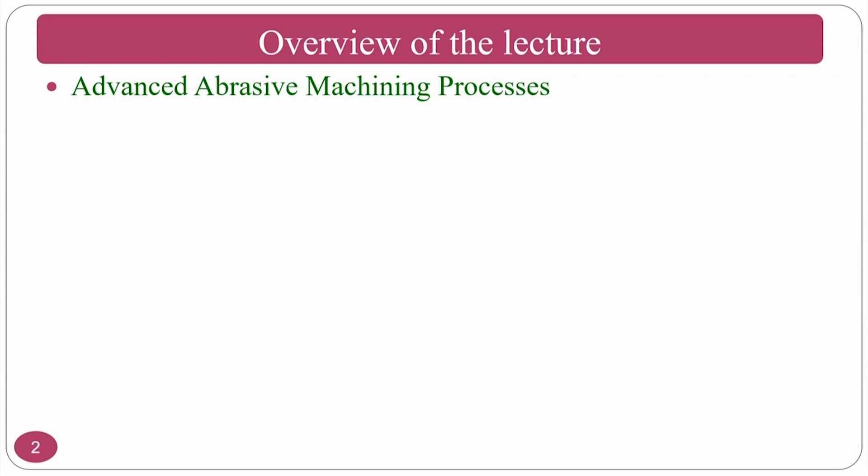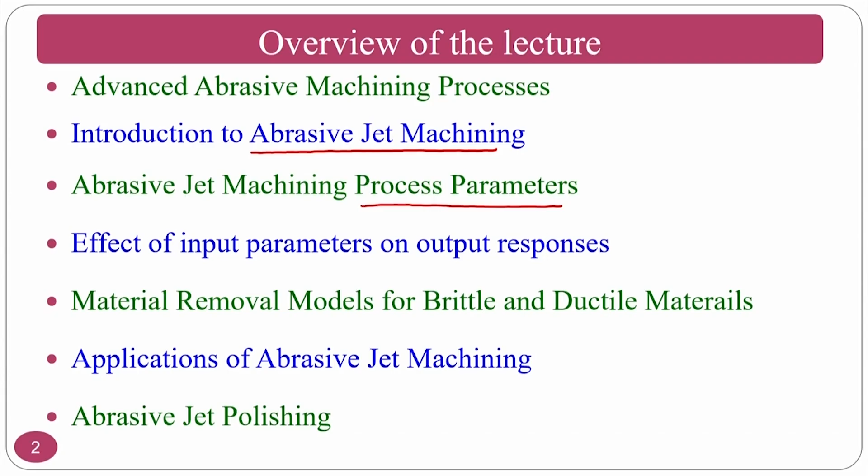Introduction to abrasive jet machining. We move on to abrasive jet machining, its process parameters, input parameters and output responses, and the effect of how each input parameter plays a vital role on the output responses, the material removal models for brittle and ductile materials, applications of abrasive jet machining, and at last a glimpse of abrasive jet polishing. This process can also be used for polishing applications, but the application wise for polishing is very less, so we just see a glimpse.

The advanced abrasive machining processes we are going to study in this section are abrasive jet machining, abrasive water jet machining, ultrasonic machining and elastic emission machining. These are mechanical processes where abrasives are used, and while there are a few other processes, these are the predominantly used abrasive processes in the spectrum of advanced machining processes.

We move on to abrasive jet machining. Most of the slides in this particular section are borrowed from Professor Vijay Kumar Jain, Professor Emeritus at IIT Kanpur. Some of the slides are courtesy to him, as he has shared them with me, and I am very thankful to Professor VK Jain for sharing his slides.

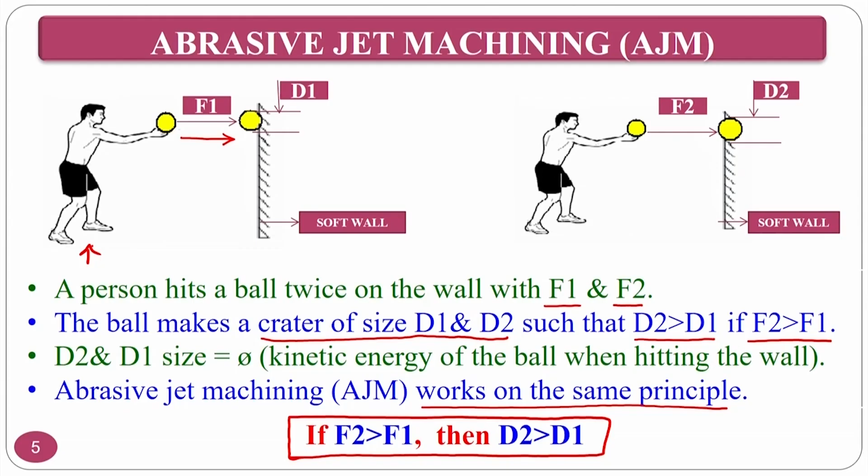And if you are going to hit this particular clay with force F1 and F2, what will happen? The crater size or cavity size formed on that solid clay will be more and more. If you are hitting with low force, small crater; if you are hitting with high force, crater will be very big. So, based on this principle, people came up with a technology called abrasive jet machining.

In this AJM, what you have to note is the carrier medium is air, or gas. You can use inert gases or other gases also to carry the abrasive particles along the direction of the velocity of the air.

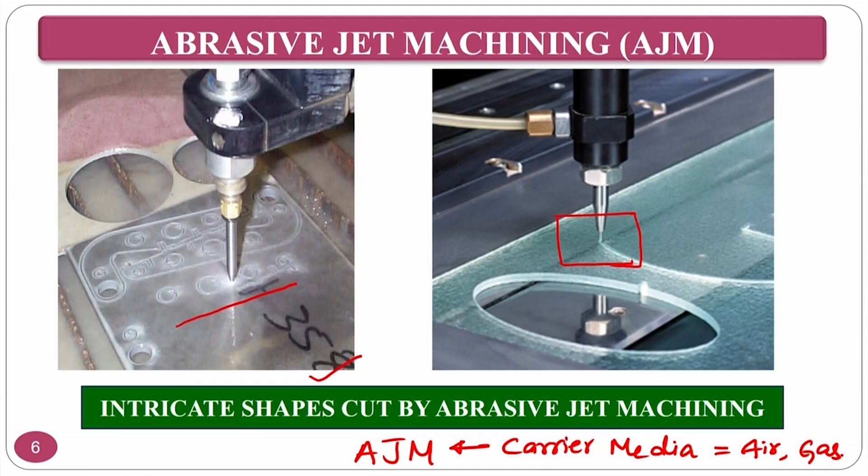The principle: fine particles, normally 0.025 mm, are accelerated in a gas stream, commonly air, at a few times atmospheric pressure. That means you can use 10 bar, 20 bar, 30 bar, 50 bar, like that. If you use terms in bar, people will understand that.

I am saying bar, but internationally, if somebody is watching, assume that if I use 10 bar, that means 1 megapascal. So you can use 1, 2, or 3 megapascal of air pressure, which is the carrier medium, and you mix the abrasive particles and inject them onto the surface to be impinged, so that you can cut intricate shapes or generate craters as per your requirement.

The particles are directed toward the focus of machining, less than 1 mm from the tip, which is normally called the nozzle tip distance. You will come across this term in the upcoming slides. You just focus on the workpiece so that you can cut it.

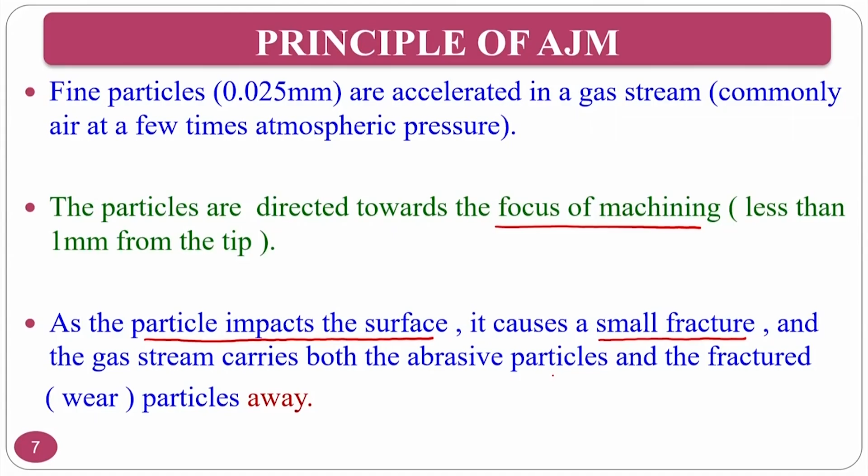As the particle impacts the surface with high velocity, this causes a small fracture, and the gas stream carries both the abrasive particle and the fractured particles away. So the gas stream, which is air, will carry both the abrasive particle and the fractured wear surface away. That means whenever you impinge, if it is a through cut, it will carry the debris as well as the abrasive particles.

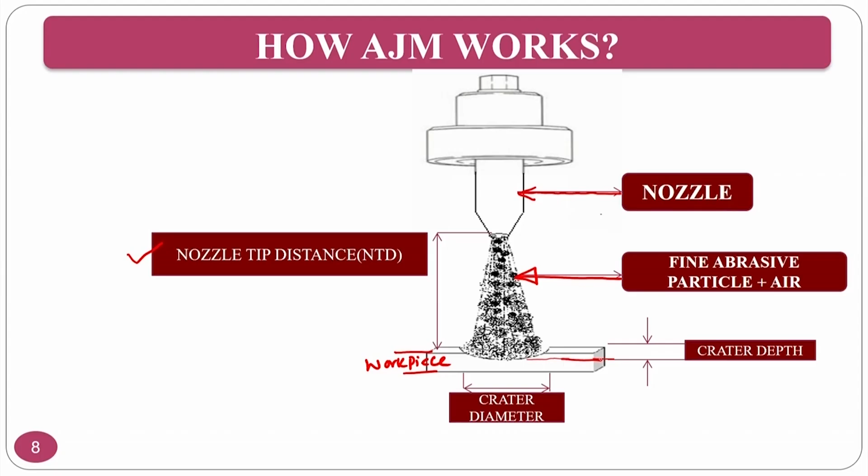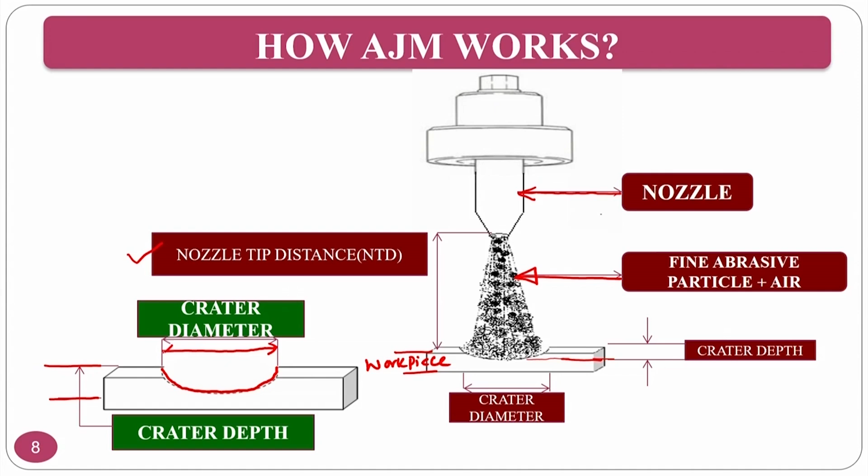So, how do you measure the crater diameter as well as the crater depth? If you see, this is my crater. The crater has its own crater depth, and at the same time you can measure the crater diameter. Depending on input parameters like air pressure, abrasive particle size, type of abrasive, and type of workpiece material, these will decide the crater depth as well as the crater diameter.

So compressor with a relief valve, air filter, dryer and other things. Dryer is required because you do not want any wet condition in the atmospheric pressure. So the compressed air will now be generated.

The opening valve will be there, a pressure regulator. This pressure regulator will tell what is the output pressure. Is the air that is passing here 1 megapascal, or 10 megapascal, or 20 megapascal, or something, whatever the pascal value that will show.

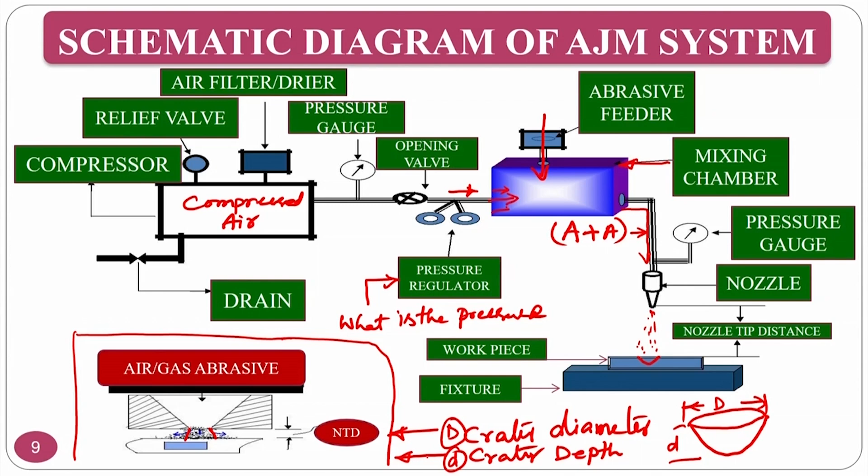The crater will be generated like this. Assume this is the diameter D and this is the depth small d. This will be the crater diameter and this will be the crater depth. So like that you can generate the cavity or crater on a particular material.

So the gas supply filters are required to filter out the moisture and other unwanted things, and the pressure regulator. You mix the powders here and you can even give vibrations to it so that you get more and more mixing at the same time.

Once done, then you just impinge. Now if you impinge, what will happen? The machining will take place properly and you can orient your nozzle as per your requirement.

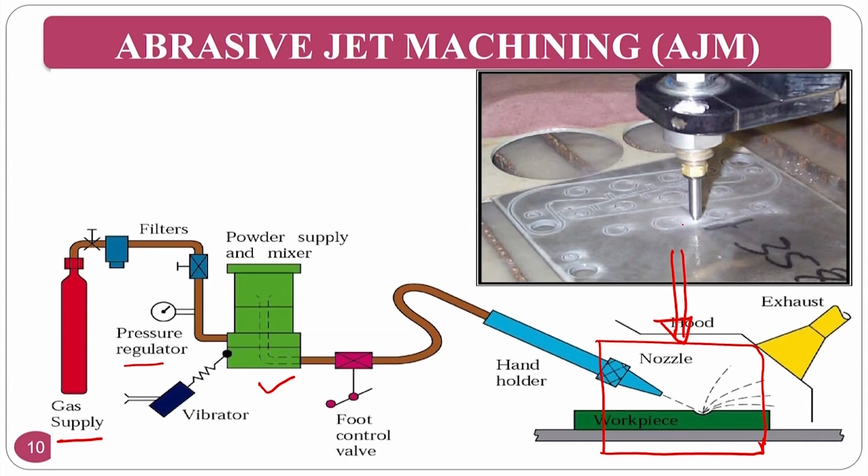Practically you can see how the cutting action is taking place by the abrasive jet machining. So the same thing you can see here, this is the nozzle and this is the machining. The box which is shown in a schematic is clearly shown in the experimental way.

So this is one of the experimental setups practically developed at IIT Kanpur. Again, I am very thankful to the professor who developed this at IIT Kanpur.

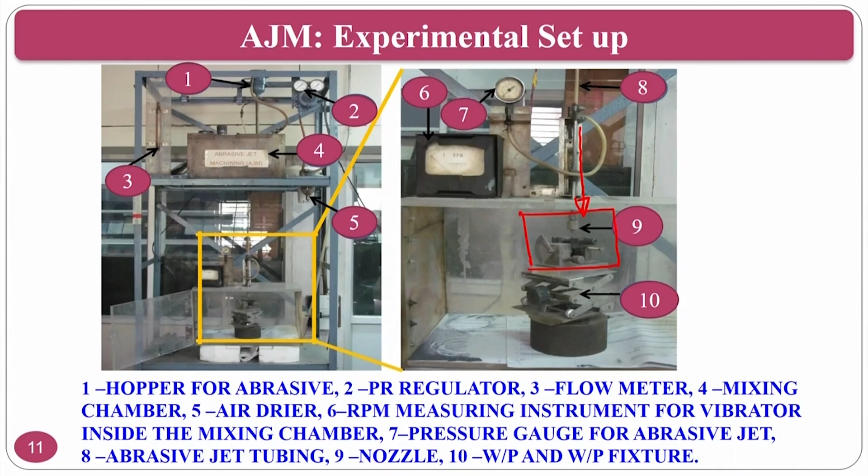Normally it shows a hopper for the abrasive, pressure regulator, flow meter, mixing and other things. This is the workpiece and abrasive jet machining region where the high pressure abrasive mixing is coming and impinging on your workpiece surface, so that machining takes place, the crater takes place and material removal takes place.

So what are the systems and components that play a major role in abrasive jet machining? One is the gas propulsion system, which is nothing but the supplying of clean and dry air which propels abrasive particles. Compressors are normally required.

Now if you want to compress the air to higher and higher pressure, you require a compressor. And the gases used should be non-toxic, cheaply available, and easily available. One of the best examples is air, which is considered the cheapest and most economic option, easily available in the atmosphere. Then there is the abrasive feeder, where normally the quantity is controlled by vibration.

You can control the vibration and control the amount of abrasive particles that are falling, controlling how much particles you require. You'll come across the term mixing ratio in the upcoming slides.

There you will see how much abrasive particles come with respect to the carrier medium, that is the air. The machining chamber should be well closed, abrasive particle content should be below harmful limits, and a vacuum dust collector should be attached. This should be carried out in a closed environment because if you are machining a ceramic or brittle material with brittle abrasive particles, there will be a brittle fracture and nanoparticle fragments with very high surface area that can cause problems to the operator. So it should be done in a closed environment.

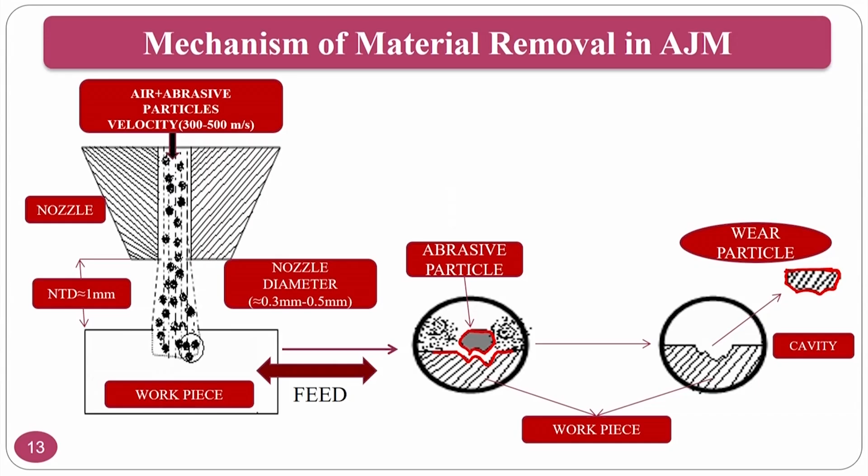In the mixing chamber, as the length of the chamber increases, mixing becomes better, but at the same time it may decrease the velocity. So bore diameter, type of chamber, and workpiece parameters like hardness and geometry details play a major role.

In the abrasives, flowability of abrasives, type of abrasives like SiC (silicon carbide), alumina, boron carbide, or cerium oxide, and the volume fraction you are going to mix, meaning whether you mix in ratio 1:1 or 1:10 or something.

At the same time, abrasive particle size, whether it is fine, coarse, or medium, plays a role. And the carrier medium also plays a major role. Which type of carrier medium, whether you are going to use air or argon or any other inert gas, and the pressure, how much pressure.

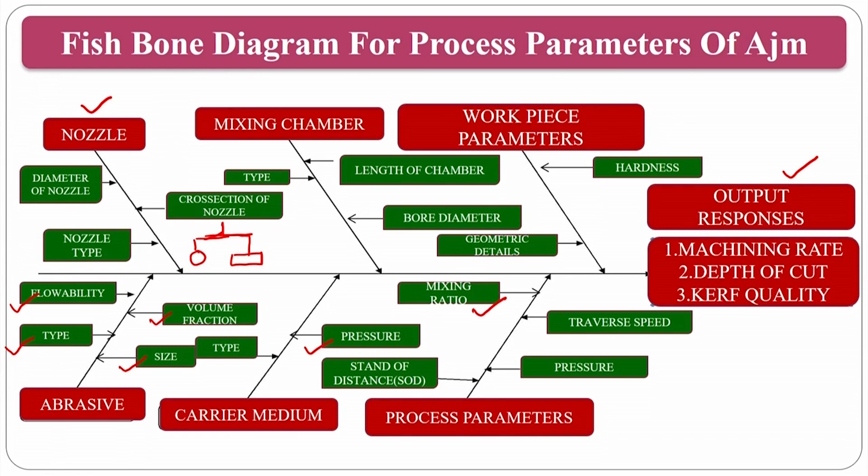So the abrasive jet machining process parameters, the main parameters among all the spectrum, we have 3 or a few more that some people follow.

The most important one is the abrasive particle, which is nothing but the composition, strength, size, and mass flow rate of abrasive particles.

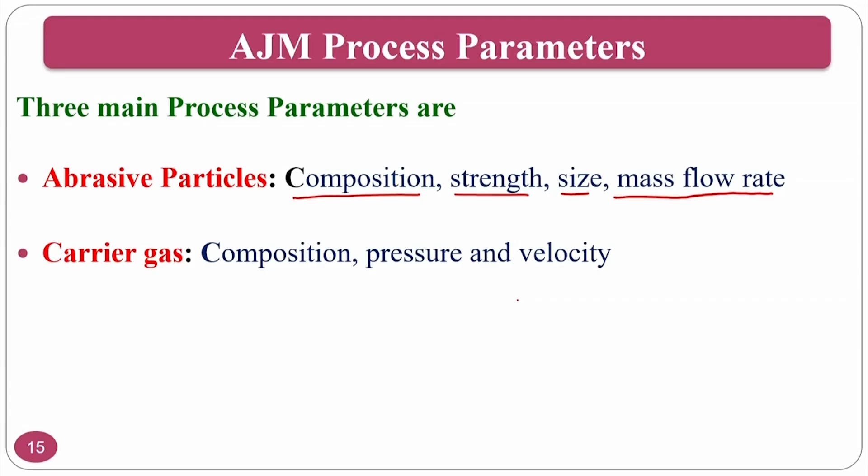At the same time, carrier gas composition, like air or argon or any other inert gas you are going to use, at what pressure and at what velocity it is helping the abrasive particles to hit the workpiece. And the nozzle geometry, nozzle material, because as we have seen in the previous slide, sapphire is one of the best materials.

The life will be approximately 300 hours for one nozzle. So if you are going to use very low quality materials for the nozzle, what will happen? Your nozzle goes off, your nozzle wears out, and you have to go for a new nozzle. So the non-productive time increases, so the product cost will go up, because your production time will increase for a particular component.

The standoff distance is one of the things, that is nothing but nozzle tip distance. Some books follow nozzle tip distance, some follow standoff distance. The standoff distance and nozzle tip distance are both the same, which is nothing but the distance from the starting of the nozzle to the surface of the workpiece. This is nothing but the standoff distance or nozzle tip distance.

And the feed rate, at the same time inclination to the work. So whether you want to go for a certain inclination to the workpiece, or whether you want to put it perpendicular, all these parameters play a major role among the fishbone diagram.

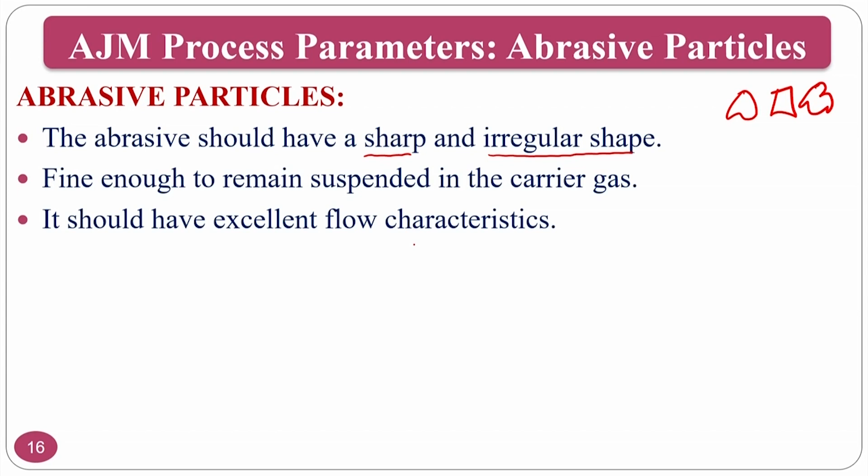It should have excellent flow characteristics, because it should follow the path of the carrier gas, so that it will do the required purpose.

Al2O3 is normally used for cleaning purposes, cutting purposes, and deburring purposes. Silicon carbide is normally used for applications similar to Al2O3.

But for harder materials, that means if you are going to use Al2O3 for softer materials, and if your customer comes with a slightly harder material, then you can go for silicon carbide. And for glass beads, you can go for a matte finish.

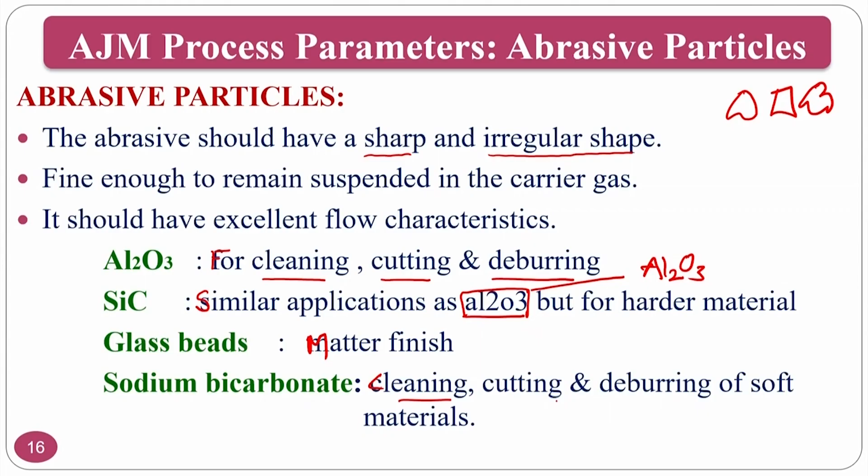Sodium bicarbonate can normally be used for cleaning applications, cutting, and deburring of soft materials, and other such purposes.

So, abrasive sizes and functions. If the size is small, large, or otherwise, normally the abrasive particle size of 10 to 15 microns is commonly used, because if you use very small particles, there will be a problem of agglomeration, meaning multiple particles will come together as an agglomerate. Normally in this gas assisted process you may not get this, but in water jet machining, or when some people use other liquids, agglomeration will be a problem. So you should go for specified particle sizes.

Normally small sizes are used for cleaning and polishing, and larger sizes are used for the cutting process. As I said, we will see abrasive jet polishing at the end of this class, where you use fine abrasive particles so that you can get the polishing operation.

Reuse is basically not recommended, because it will be contaminated with chips and may block the nozzle passage, lowering ability and lowering cost. That means, assume I have an abrasive particle with a very sharp edge. Whenever you use it the first time, the sharp edge may remove the material, but the second time, what happens? It becomes blunt and its efficiency goes down.

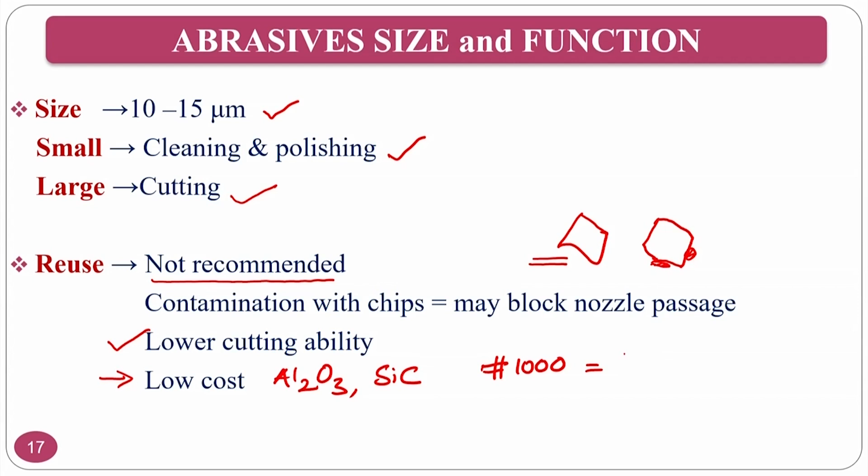At the same time, abrasive particles are not that costly, so it is economical to go for Al2O3 or SiC. These particles nowadays, compared to what we used in 2015 and 16, you can get in the Indian market at around 1000 mesh size for approximately below 500 rupees. So up to 1000 mesh size, you can get approximately 500 rupees per kg for Al2O3 or SiC, both approximately available within India.

Some companies placed in Agra provide this type of abrasive particles. If you go for better abrasives from abroad nations like Germany and other countries, import and export charges may come into picture and the cost of the abrasives may go up. For the applications of abrasive jet machining, I guess you can go ahead with this available abrasive particles in India.

The second thing to note down is that normally aluminum oxide (Al2O3), silicon carbide, sodium bicarbonate, dolomite, and glass bead are the commonly used abrasives. The different particle sizes are also mentioned, and aluminum oxide and silicon carbide are mostly used in abrasive jet machining for the cutting operation and grooving operation.

At the same time, for light finishing, I normally go for sodium bicarbonate, which can be used for finishing applications. At the same time, dolomite can be used for etching and polishing applications, and for light polishing and fine deburring, you can go for glass beads.

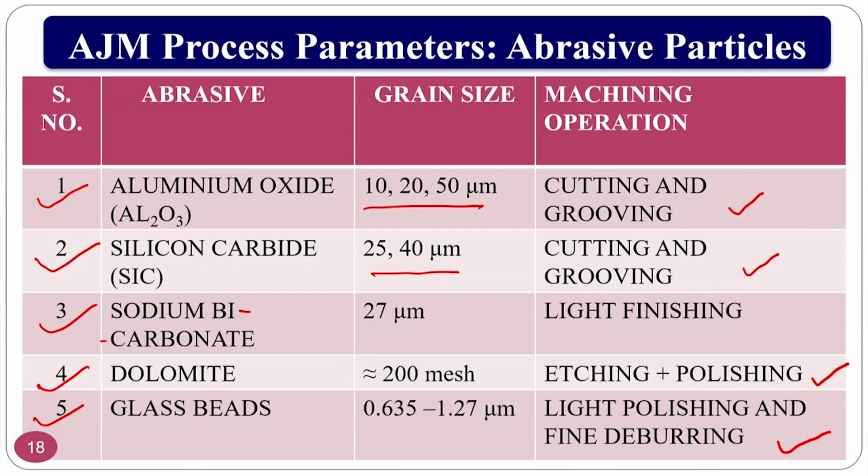There may be very few papers on abrasive jet polishing, so you can choose abrasive jet polishing as one of your topics by choosing dolomite or sodium bicarbonate as your abrasive particles. Use appropriate pressures and you can work on those workpiece materials. Just do some literature review and you can get information and move on to a good topic.

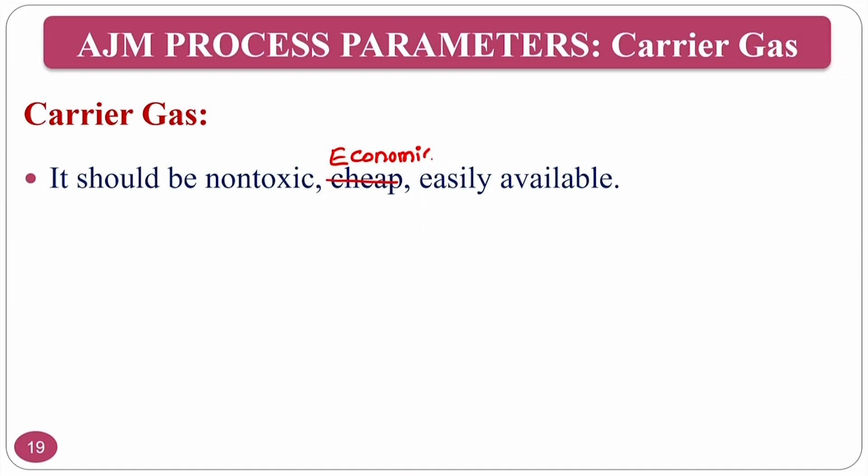So, the second one is a carrier gas. Normally carrier gas, it should be non-toxic, cheap, easily available. I can say instead of cheap, you can say economic is a good word to use rather than cheap.

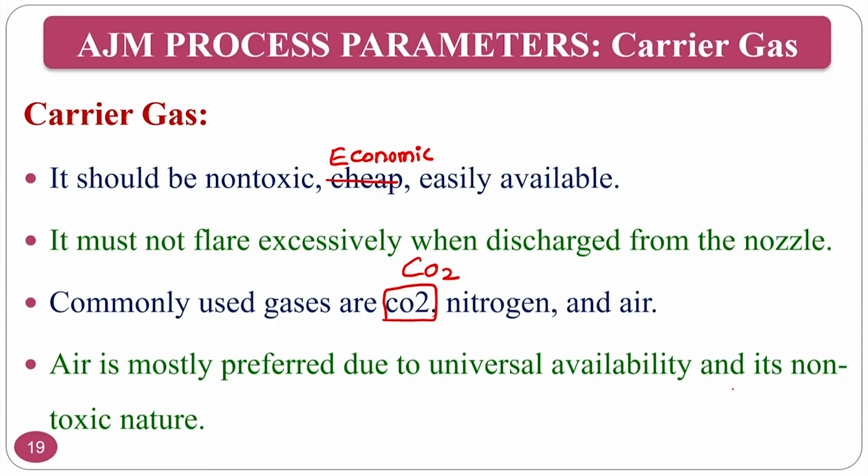It must not flare excessively when discharged from the nozzle. That means it should not diverge much. If it diverges, then your requirement will be gone. Commonly used gases are CO2, nitrogen, air and other things. Air is commonly available. Air is mostly preferred due to universal availability and its non-toxic nature, because regularly we are breathing it in. So air is non-toxic, at the same time it is economic.

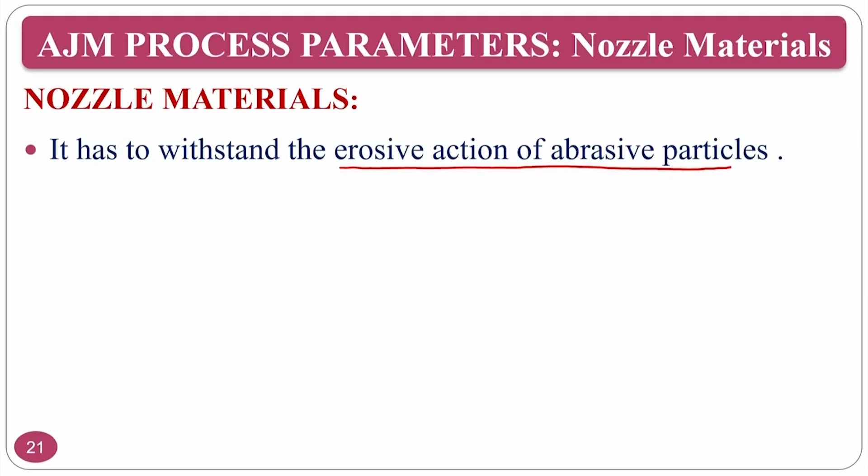It has to withstand the erosive action of abrasive particles that pass by the nozzle, because the abrasive particles are mixed with the highly pressurized gas in the mixing chamber, then it is pushed. That means these abrasive particles also attack the inner walls of the nozzle. So the erosive wear of this nozzle should be less, with high resistance to wear, meaning it should be a wear resistant material, fabricated with circular or rectangular cross section. Normally you can use tungsten carbide and sapphire.

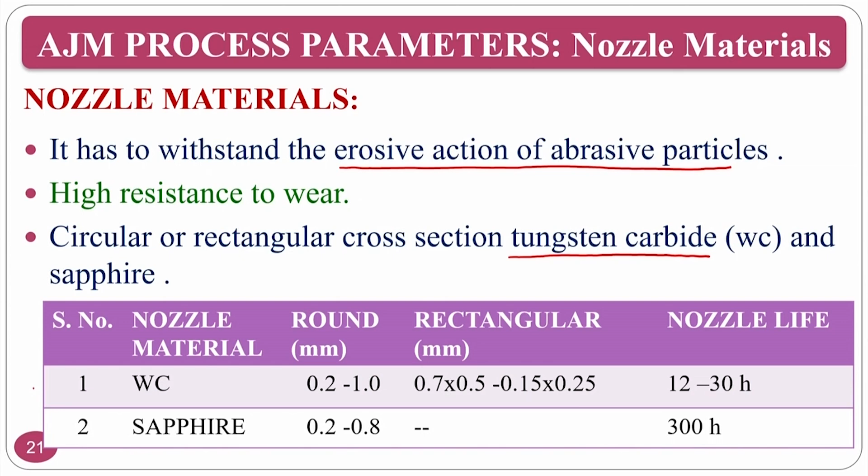Sapphire is basically the preferred material. If you compare tungsten carbide and sapphire, the nozzle life for tungsten carbide is approximately 12 to 30 hours. But here the problem is that you have to replace the nozzle again and again. Assume average life is like 20 hours. So every 20 hours you have to replace the nozzle. Because of this, the non-productive work or non-productive cost of your manufacturing will increase.

So to avoid that, you can go for sapphire, whose life is 300 hours. The changing of this nozzle will be reduced, at the same time time will be saved and the production rate will be increased. So you can sell the product at an economic price subject to the cost of tungsten carbide and sapphire. If both costs are approximately the same, then you can recommend to your shop floor people that you go for the sapphire.

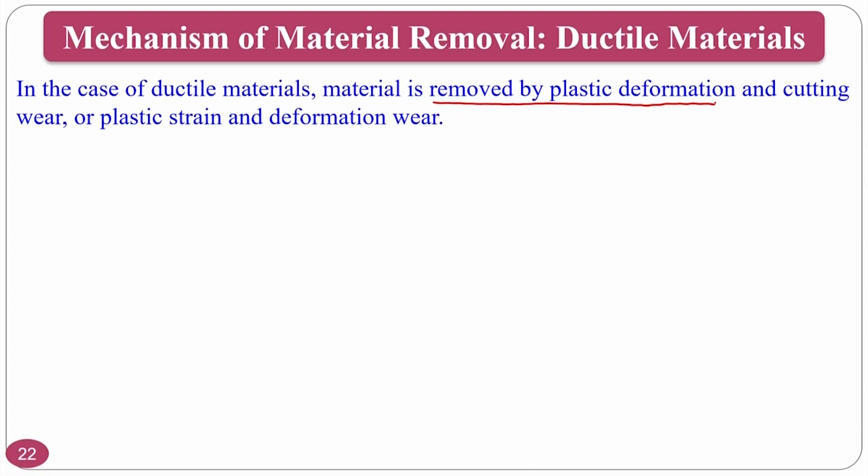So the material removal mechanism for ductile materials: material is removed by plastic deformation and cutting wear, plastic strain and deformation wear. During impact, when the yield strength of the material is locally exceeded, plastic deformation takes place in the vicinity of the impact. That means whenever the abrasive particle hits a ductile material, there will be plastic deformation, and since nothing in this world is perfectly flat, there are peaks on the surface, so it also shears the peaks, removing material by shearing action also.

After multiple impacts, the plastically deformed surface layer may form near the eroded surface, and therefore the yield strength of the material increases due to strain hardening. Upon further deformation, the yield strength at the surface will eventually become equal to the fracture strength. No further plastic deformation will take place and fracture will occur. At this point, the material surface becomes brittle and fragments may be removed in subsequent impacts.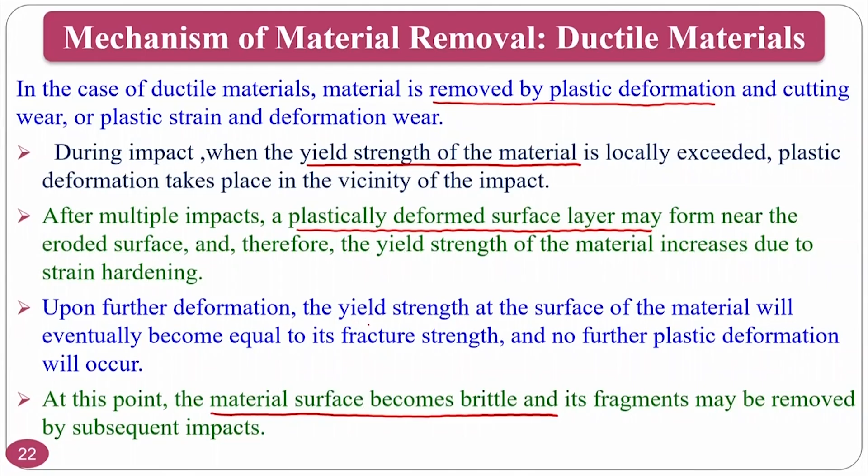That means millions and millions of abrasive particles carried by the carrier gas impinge on the workpiece. So plastic deformation and strain will keep increasing, and fracture will take place. At a certain point, the yield strength eventually becomes equal to the fracture strength, and fracture takes place in the material, and it goes out as a chip. This is the point you have to note: the yield strength increases until it reaches the fracture strength, and the fractured material goes off, leaving a cavity there.

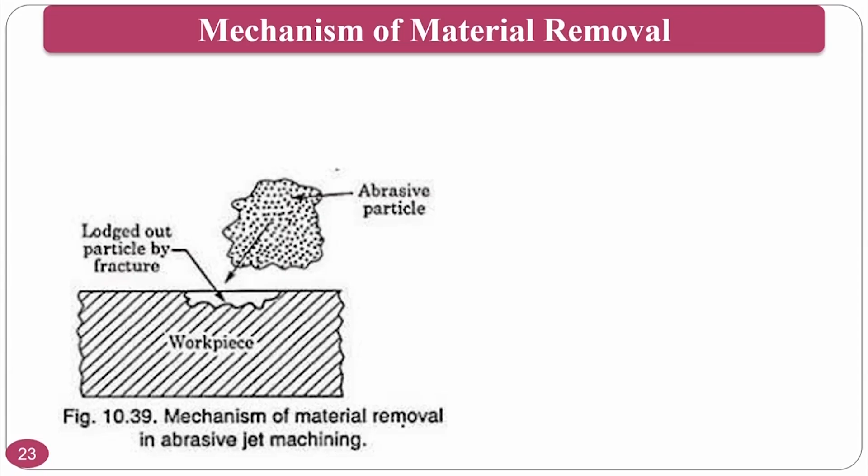So the material removal mechanism shown previously is for ductile material. If you go for brittle material, during the erosion process the particle impact produces different types of cracks, and the chipping is due to brittle fracture with negligible plastic deformation. So what you saw before is plastic deformation taking place for ductile material.

Whatever you are going to see here is for a brittle material. If an impact is coming and hits the surface, there will be cracks, and this eroded material will remove the material in the form of fine chips. So that means for abrasive jet machining, the best suitable material to remove is brittle materials.

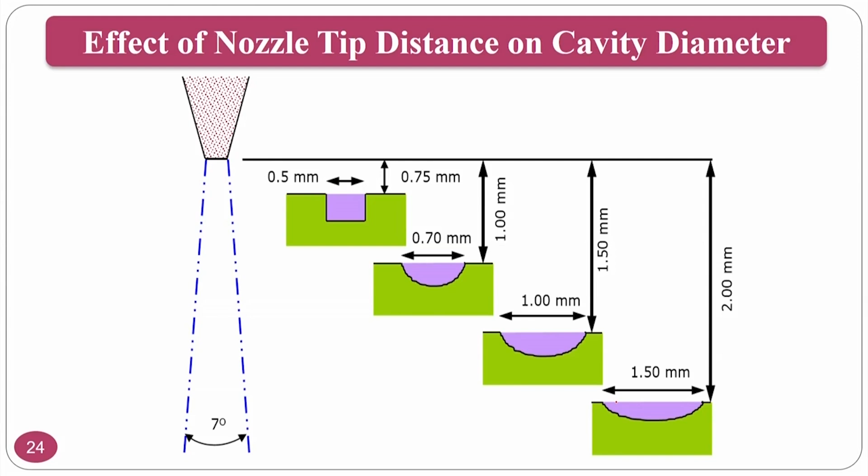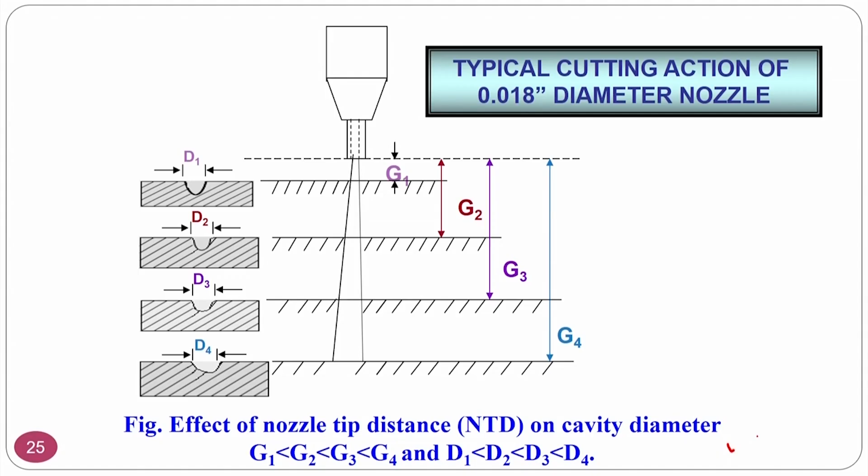Nozzle tip distance versus cavity. If the tip distance increases, what will happen? The cavity diameter will increase and the depth will decrease. If you see here, this is a schematic for better understanding. G1 stands for nozzle tip distance and G2 stands for the increased nozzle tip distance. As the distance goes on increasing, your diameter will increase, but your depth will decrease. That is what we want to convey from this particular slide.

Effect of nozzle tip distance on the cavity diameter. In cutting, the nozzle is positioned very closely to the workpiece, normally the distance is 0.8 mm. At the closed nozzle tip distance, cutting rates are compromised for the sake of increasing accuracy. That means whenever the nozzle tip distance is low, your interest is to get the perfect cut or perfect, accurate dimensions that you want.

If the nozzle tip distance is small, it eliminates the taper and minimizes the kerf. The typical divergence angle normally will be 7 degrees for air.

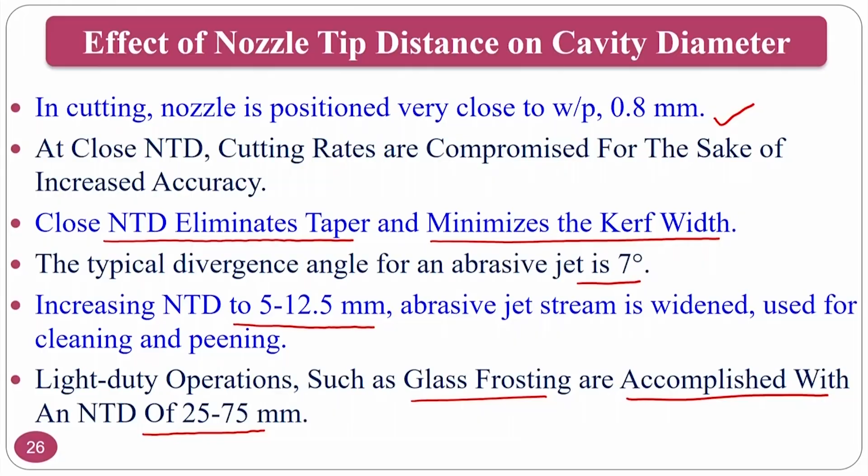If you increase the nozzle tip distance to 5 to 12.5 mm, the abrasive jet stream becomes widened and is used for cleaning and peening applications. That means at higher distances, it is not going to do the machining operation; however, it is going to do the cleaning or peening operation. Light duty operations such as glass frosting are normally accomplished with the nozzle tip distance beyond 25 mm. So whenever you want to do glass frosting and other things, you just go for far away distances like beyond 25 mm, so that it will do some texturing on the surface of the glass. So some of the people who want to take up research in texturing of brittle materials can go for the abrasive jet texturing process also.

Parametric analysis: for abrasive flow rate, it is observed that high abrasive flow rate leads to high material removal rate. More cutting means higher MRR. If the abrasive particle size is very big, the cutting action will be very high and material removal will be very high. With low abrasive flow rate, the MRR will be low due to less cutting edges and other things.

Nozzle tip distance: as I said, if your nozzle tip distance is low, you can use it for cutting purposes. If the nozzle tip distance is high, you can use it for cleaning or peening purposes and other things. If the nozzle pressure is very high, the material removal rate will be very high. If the nozzle pressure is low, you can use it for cleaning or texturing applications and other things.

The mixing ratio is nothing but the volume flow rate of the abrasive particles to the volume flow rate of the carrier gas. You have two things here: one is the gas, another is the abrasive particles. If the mixing ratio is very high, that means your abrasives are higher in number compared to your carrier gas. So an increase in the value of M, the mixing ratio, increases the volumetric material removal rate. Normally some people represent MRR as material removal rate, and MRRV as volumetric material removal rate, as shown here. But a large value of M may decrease the jet velocity and sometimes it may block the nozzle also.

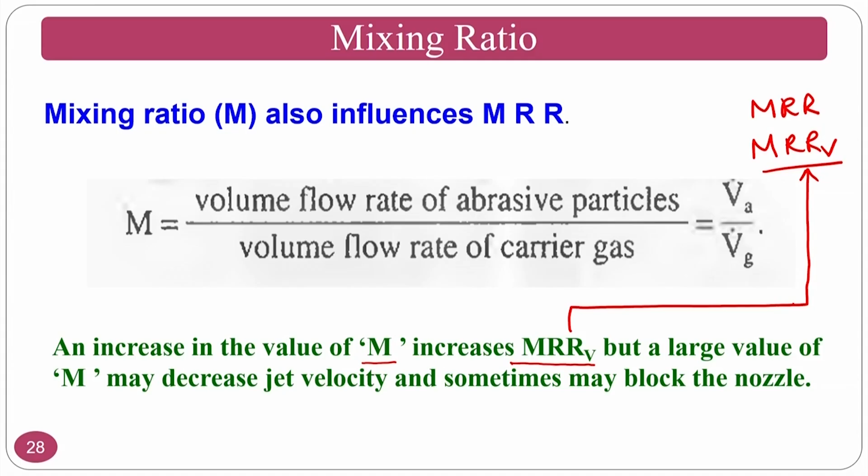Everything has its own limitation. If you use more and more abrasive particles, the abrasive particles collide with each other and lose the original velocity at which they have to travel and hit. At the same time, there is another problem: these abrasive particles may block the nozzle. So if there is too much abrasive particles, it will be a disadvantage.

As a manufacturing engineer, you should always think about the optimum mixing ratio so that you can get the required function, whether it is machining, cleaning, peening or something. Volumetric flow rate of abrasive to volumetric flow rate of carrier gas is nothing but the mixing ratio.

Normally, mass ratio is also there, that is nothing but mass of the abrasive particles to the combination of mass of abrasive particle with carrier gas.

So the volumetric material removal rate, if you see here, is CF theta MVN, which was given by Finnie in 1960, where C and N are constants and the flow stress of the workpiece is also given here. So if you see the output responses, that is how the abrasive jet machining works, the MRR increases only up to a certain value.

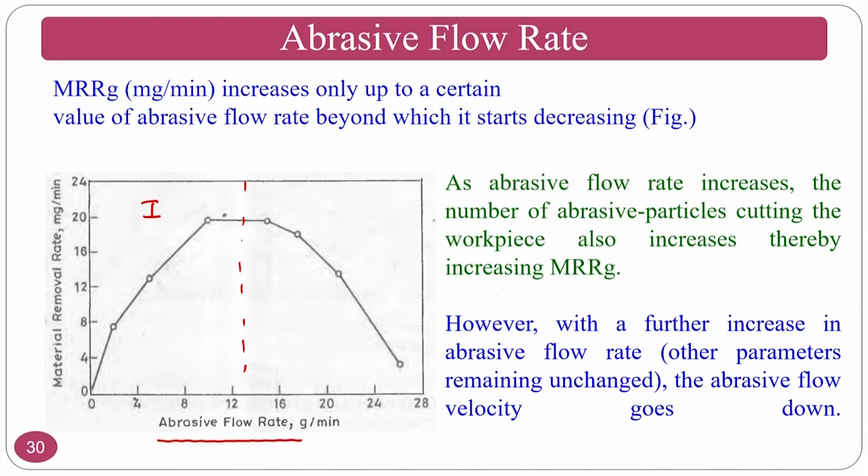So the craters formation will be very high and material removal will take place. But beyond a certain value, if you increase the abrasives further, the abrasives will hit one another and their velocity will be reduced. The abrasive flow rate increases, the number of abrasive particles cutting the workpiece also increases, thereby material removal increases - this refers to part 1.

However, with further increase in abrasive flow rate, the abrasive velocity goes down, because in section 2, the abrasives try to collide with each other and there is a loss in velocity. At the same time, this may also clog the exit of the nozzle. If it is partially clogged, then the velocity at which it has to come may be completely disturbed - that is the cause for the second portion.

So the material removal rate will decrease if you go beyond certain values. From this particular graph, the inference is that people can use these values for optimum, like you can go for 10 grams per minute, maximum to 16 grams. If your material removal rate is good at 10 grams per minute, you can go for 10 grams per minute so that you can achieve the better material removal rate in this context.

If you see the other parameters, normally nozzle tip distance - if the nozzle tip distance increases, what happens is the crater diameter will change. If the nozzle tip distance is low, the material removal will be good. If you increase beyond that, the crater depth will reduce, but crater diameter will increase.

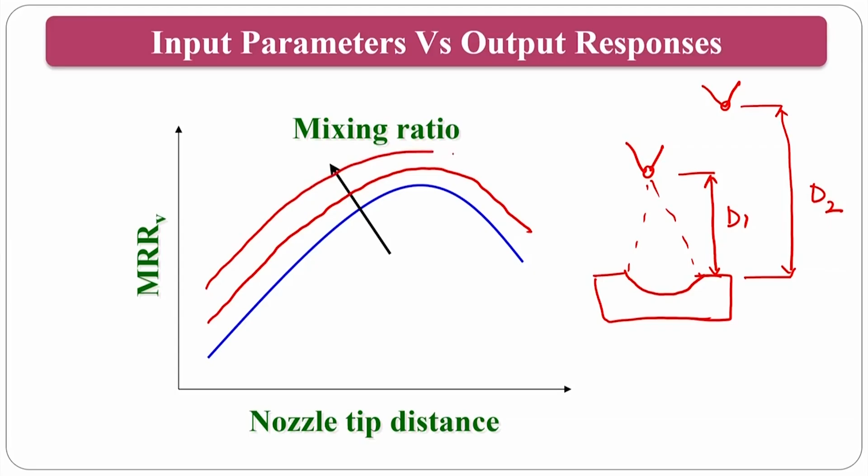If your mixing ratio is high, that means abrasive particles are high, normally what you expect is the curve will move like this. Beyond a certain value, again it will go down, because of the same reasons as in the previous slide - it decreases the velocity and may also block the nozzle.

If you see mixing ratio with respect to nozzle pressure, that means how much pressure you are increasing. If you increase the pressure, the jet will come and hit with high velocity, and for that purpose the material removal completely increases. At the same time, if you increase the mixing ratio, obviously the material removal increases. If the nozzle pressure increases, the velocity at which the abrasive particle hits will be very high, the crater size will be very high, and the material removal volume will be very high.

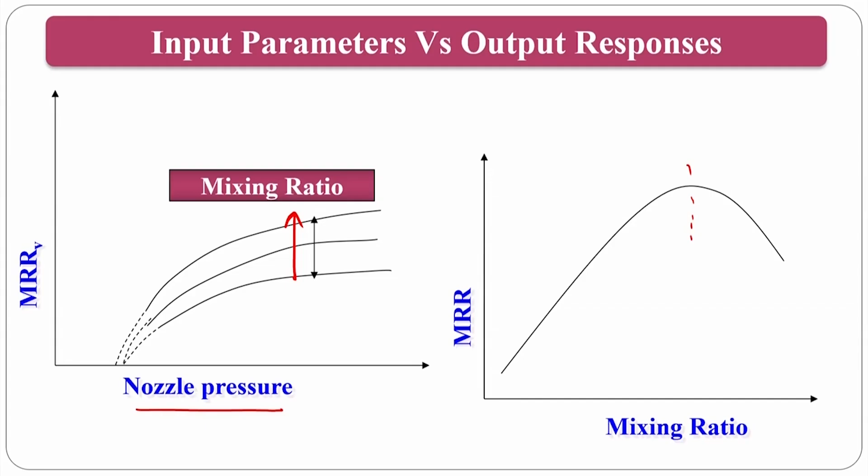Mixing ratio, as you have seen in the first slide, if your mixing ratio is up to a certain value, like 10, and it increases beyond which it blocks, internal collision of the abrasive particles will lead to pressure and velocity decrease, and other things will take place.

If you see the standoff distance increasing for the mixing ratio 2, previously whatever you have seen is a qualitative thing, but if correct values are required quantitatively, better material removal is achieved if your mixing ratio is very high. At the same time, for the nozzle, standoff distance is approximately 16, and you can achieve a better value. So the mixing ratios are ranged from 0.095 to 0.268.

So the mixing ratio means the abrasives are increased. If the abrasives are increased, normally the number of craters generated will also be increased, so the material removal obviously increases.

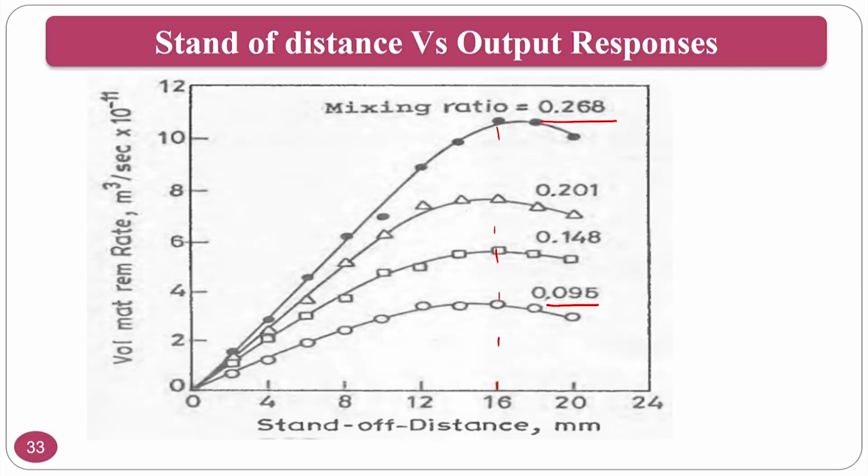If the standoff distance is increased, if it is too less, what will happen? It will not have sufficient velocity to carry. So you also need the standoff distance at an optimum value, so that you can hit the workpiece.

If you see the standoff distance with respect to volumetric material removal rate and the penetration rate, if the standoff distance is too low, then normally the penetration rate is also somewhat low, but the penetration rate will slightly increase if you give sufficient space to the nozzle. It has a certain distance where it can carry the velocity and hit the workpiece. For that purpose, normally the penetration rate will increase, and beyond which the penetration rate will decrease.

If the penetration rate decreases, what will happen? The volumetric material removal will also go on decreasing. That is what you can see in this particular slide.

So, nozzle pressure with volumetric material removal rate, here you can see all the values. In the previous slide you saw a similar one, but that was qualitative. As you increase input, it will increase output, but how much increase of the input parameter will increase how much output response, that we are going to see here.

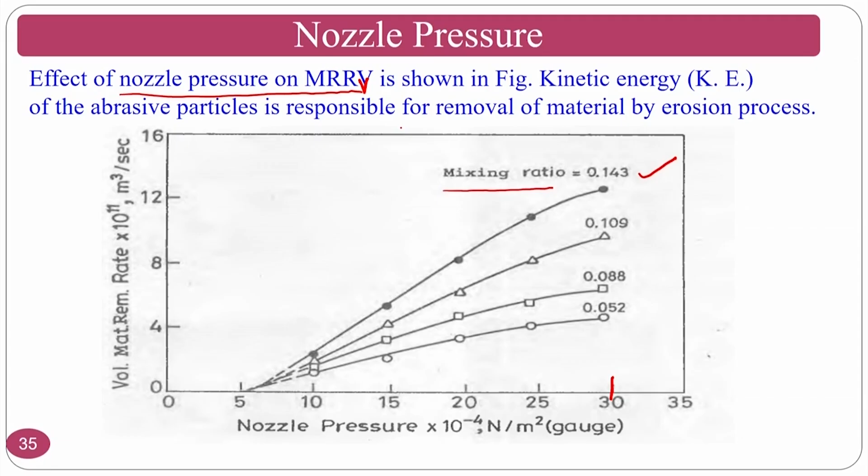That means the nozzle pressure versus volumetric material removal is shown here. The kinetic energy of the abrasive particle is responsible for material removal. So if your nozzle pressure is very high, the kinetic energy of the abrasive particle will be very high, and the material removal rate will be increased.

Now we see the material removal models for brittle and ductile materials using abrasive jet machining process. Material removal model for brittle materials, this is proposed by Neema and Professor Pandey. The assumption is material removal by normal impact only, meaning there is no additional thing involved. The abrasive particles hit the workpiece and the workpiece material is removed - that is the simple assumption.

So MRR is taken in kgs per second: 0.1156 PA, MA, VA square, divided by 10^3 sigma FW, where PA stands for abrasive particle density, MA stands for mass flow rate of the abrasive particles, VA is the component of particle velocity normal to the work surface. That means assume my workpiece is like this and my jet is like this, and abrasive particles are coming and hitting perpendicular to this particular surface. Sigma FW is the flow stress of the workpiece material.

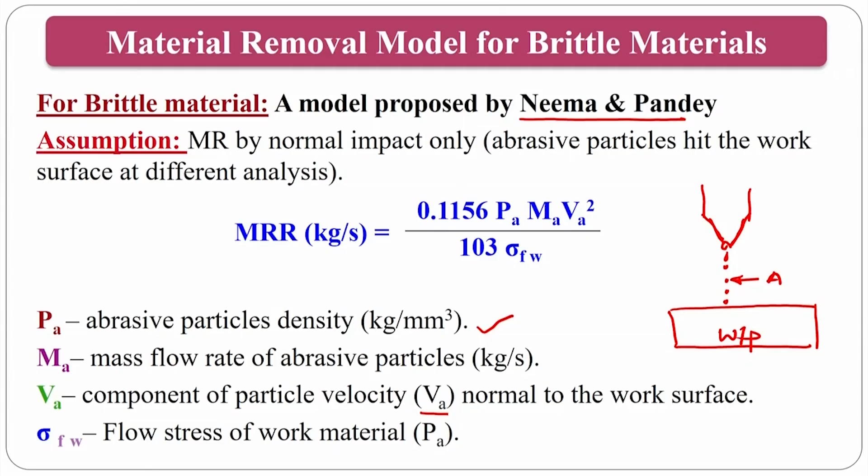These are the abrasive particles and this is the nozzle from where they come - this is what Professor Pandey has proposed for brittle materials. Now, if you see the material removal model for ductile materials, as you have seen, this particular process is mainly suitable for brittle materials because abrasives come and hit, causing fracture and small fragments of chips, which then come off.

That is the most major mechanism, suitable for brittle materials, but people have used it for ductile materials also, as discussed in the previous slides, where the flow stress becomes equivalent to the fracture stress, and then it goes off as a chip. So in the same way, ductile materials also have proposed material removal models.

Sheldon and Kanhere proposed the model for MRR for ductile materials. The volumetric material removal rate is given by K1 times D cube times VA cube, divided by 10 to the power 4.5, times rho A by HVW to the power 1.5, where various terms are given here. This is the one equation.

Here K1 is a constant of proportionality, and dm is the mean diameter of the abrasive particle or abrasive grain. VA is the volume of the impacting particle, meaning how much material is going away, and rho A is the abrasive particle density, in kg per mm cube. HVW is the Vickers diamond pyramid hardness number of the target material, meaning the hardness of the workpiece material.

The amount of material removed is related to the depth of penetration of the particle. This means how many particles are hitting, which generates deformation, and with prolonged abrasive particle impacts, fracture occurs and material is removed. So the amount of material removed is related to the depth of penetration, meaning how much penetration takes place in the workpiece material is considered for this particular model.

These are the two mathematical models proposed by different authors. This may be useful for people who want to do some related research. If you want to move ahead with this particular model, you can consider these equations as the base equations.

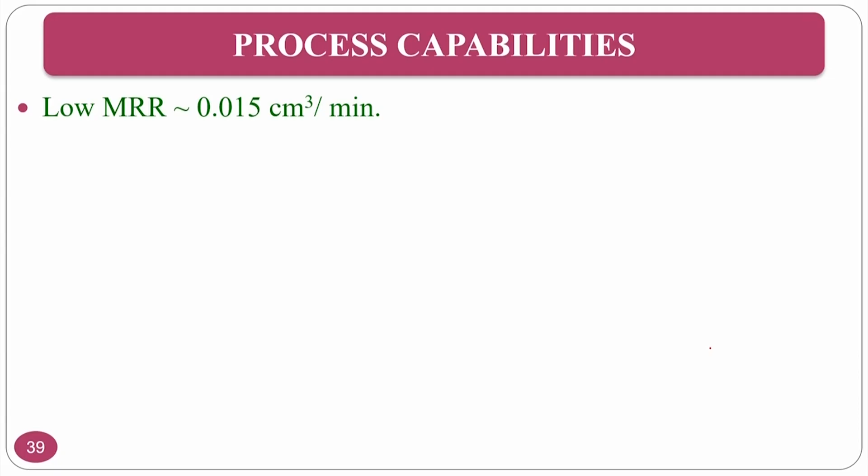Looking at process capabilities: the low MRR is normally 0.015 centimeter cube per minute for material removal. Intricate details and hard and brittle materials require this lower material removal rate. This means that when doing abrasive jet machining for intricate shapes, you don't worry much about MRR, because intricate shapes have to be machined regardless, so the material removal rate is very low for that purpose.

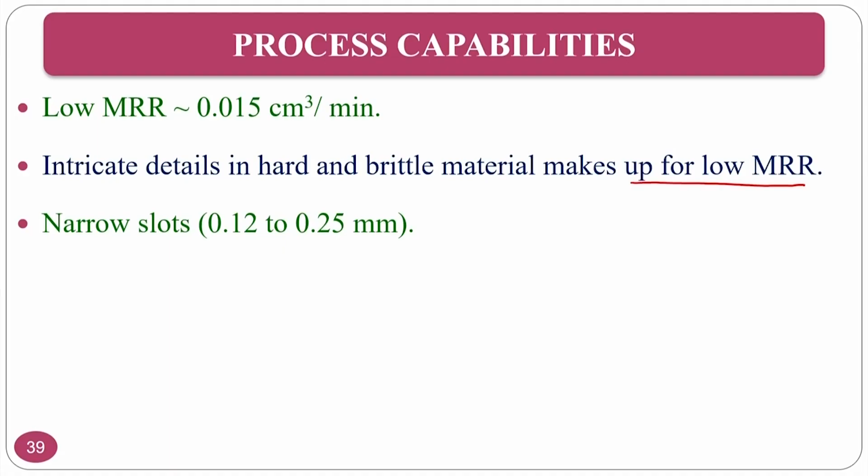Narrow slots can be cut, normally 0.12 to 0.25 mm slots using abrasive jet machining. You can achieve low tolerances ranging from plus 0.12 to minus 0.12 microns. And for good surface finish, from a nano surface point of view this is not a great value, but for machining purposes, the minimum surface finish you can get is 0.25, which is good from a finishing point of view.

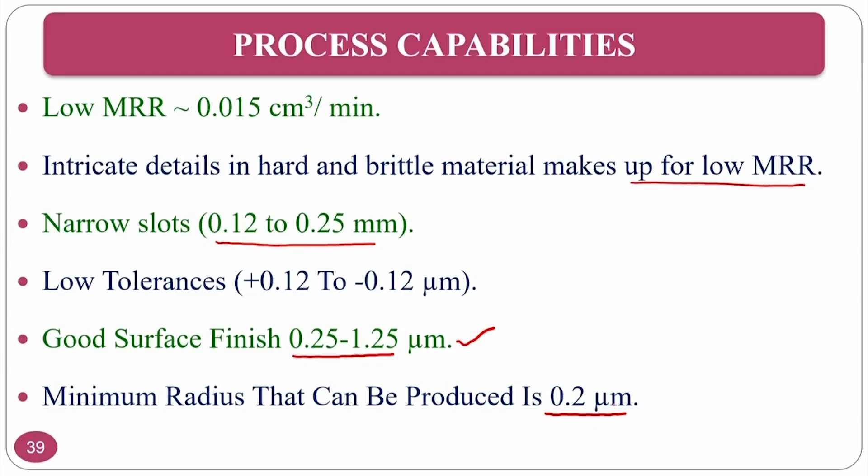But this particular process is dominated by the material removal mechanism, that's why it is a machining process, and we consider abrasive jet machining as one of the advanced abrasive machining processes. The minimum radius that can be produced is 0.2 micrometer, so this can produce a good amount of radius.

There are some more process capabilities: steels up to 1.5 mm, glass up to 6.3 mm thickness can be cut. This means if you have a steel plate of very small thickness you can cut it, or glass plates with bigger thickness you can cut using abrasive jet machining. Thin sectioned brittle materials and inaccessible areas can also be machined by this AJM process.

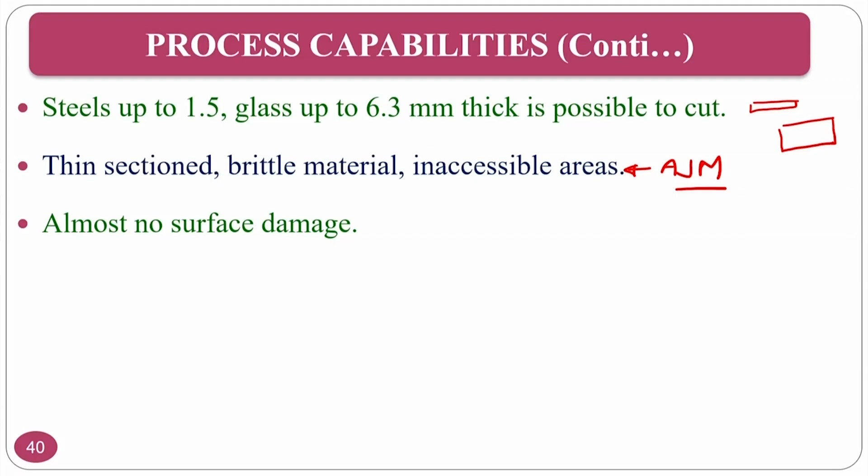These are the capabilities of the abrasive jet machining process. There is almost no surface damage because there is a gap between abrasive particles. At the same time, heat generation in this process is normally low because the air acts as a lubricant or coolant during the abrasive jet machining action.

There is no surface or subsurface damage. In thinner materials, taper is 0.005 inch per inch of material thickness, meaning for 1 inch, 0.005 inch is the taper normally observed. So if the customer's requirement is very minimal, you have to think about other processes; if it's within their requirement limits, you can go for the abrasive jet machining process.

If no taper can be tolerated on the cut edge, so the nozzle or the workpiece can sometimes be tilted to compensate this. If you don't want this type of taper, nowadays you can tilt the nozzle as per your requirement. If some microns of taper are coming, you just move or tilt your nozzle in the opposite direction to compensate it.

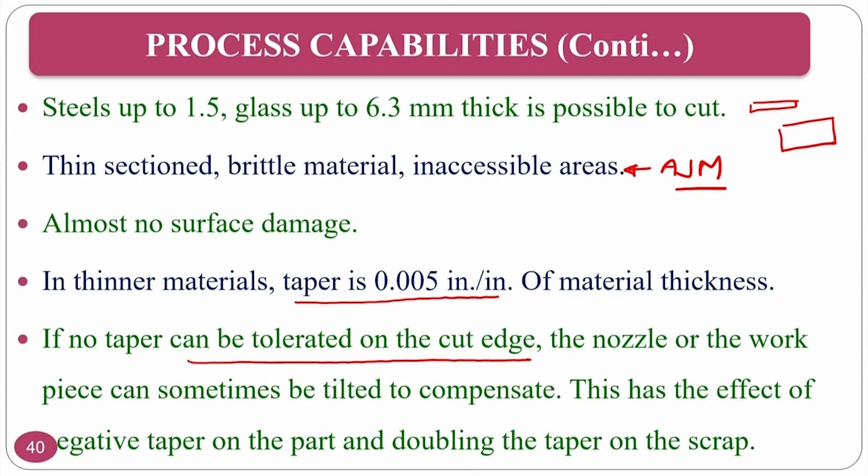Advantages of abrasive jet machining: the ability to machine heat sensitive, brittle, fragile materials. If a material is heat sensitive, it can be machined by abrasive jet machining because this process doesn't develop any heat during machining. There is very little or no heat generation due to non-contact cutting and microscopic material removal.

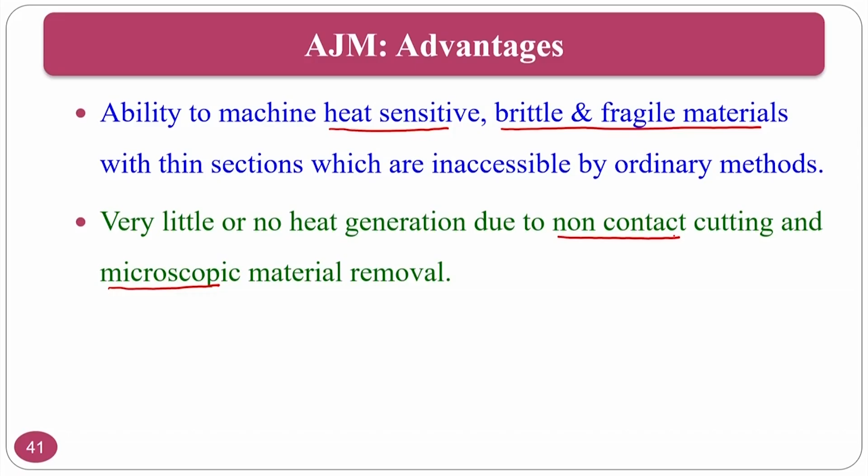The material removal is very minute. It's a non-contact cutting process—you have the abrasive particle, and in between there is an air gap, so the air acts as a lubricant or coolant. There is sufficient or ample time between one abrasive particle hitting and another, if your mixing ratio is slightly less, so there won't be any generation of heat in this process.

Low capital investment and low power consumption means you can develop abrasive jet machining in your laboratory with very minimal cost. Even without much funding, you can develop it—you just need one compressor, and normally compressors aren't that costly. There are different ratings of compressors available.

You just put in an abrasive feeder, mix it in a mixing chamber, and impinge it on the workpiece. So you can start basic research with low investment—if your institute or university can give even a minimum amount of funding, you can develop abrasive jet machining, and power consumption is also very low. The higher authorities of universities should allow you to go ahead with this process.

No part chatter or vibration is observed because there is no chance of vibration. What you have to do is firmly hold your workpiece, so that any small minute chatter issues can be avoided.

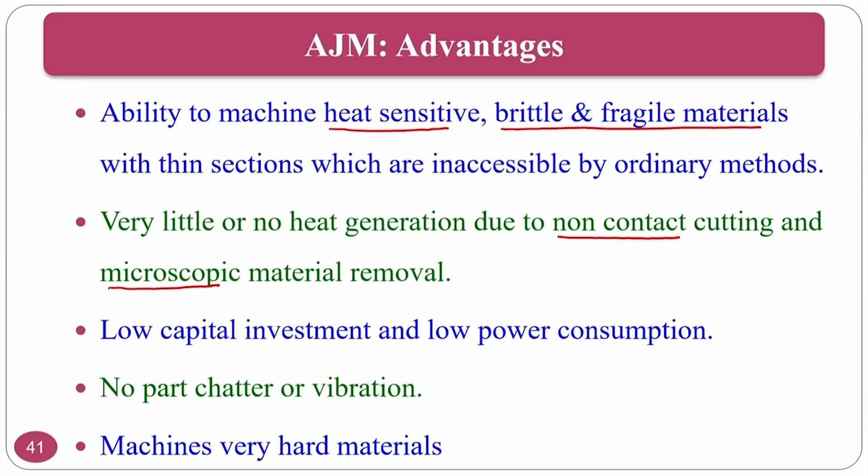These machines are very hard—they can machine very hard materials, meaning hard and brittle materials, since brittle materials are normally hard materials too. So you can do machining of these hard materials.

Disadvantages of this process: nozzle wear rate is very high. As I said, you have to go for sapphire nozzles, which normally last around 300 hours. If you go for tungsten carbide or other materials instead, the life is reduced by 10 times—maximum you'll get is 20 or 30 hours.

It cannot be used to machine soft and ductile materials, because whenever you use soft and ductile materials, these abrasive particles go and indent into the surface—sometimes they even stay embedded. Assume I have a soft material here; the abrasive particle can hit the workpiece and stay lodged like this.

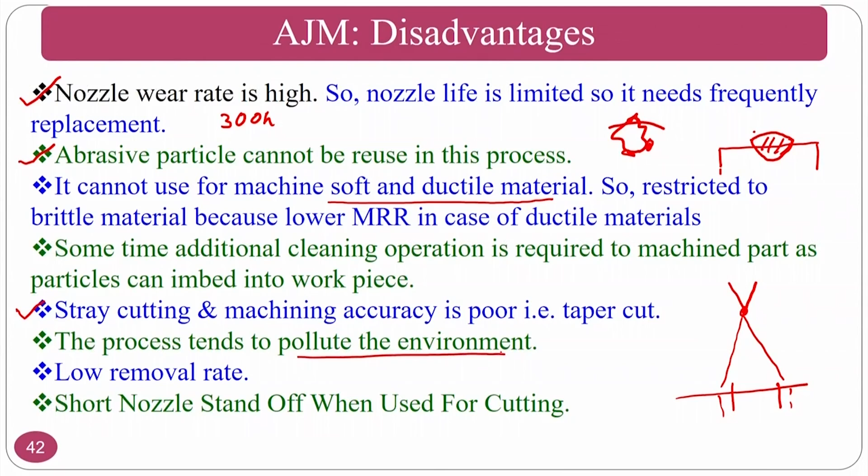The process tends to pollute the environment, because abrasive particles are brittle materials. Whenever the abrasive particles hit the hard workpiece materials, it will generate some dust. Like gas is there, already you have air plus abrasive dust. This will lead to pollution.

Low material removal rate, at the same time short nozzle stand-off distance is used for cutting purpose. If at all you want to go for cutting, you have to use a very low nozzle tip distance or stand-off distance. This has to be taken care of if you are going for a cutting operation. If you are going for a peening operation or surface cleaning operation, you have to go for high stand-off distances.

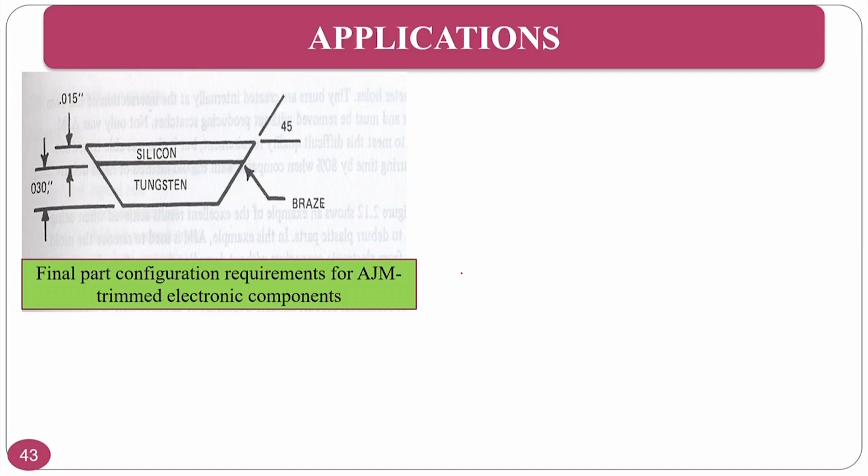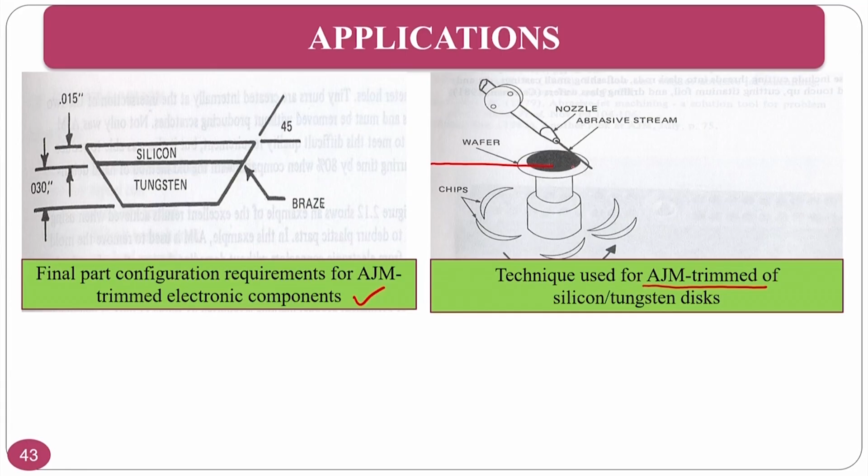Applications: normally silicon or tungsten configuration requirement for AJM, for the trimming of electronic components. At the same time, you can use AJM trimming for silicon. You can use it at different angles for trimming application. This is one of the techniques that you can use.

AJM is successfully employed for manufacturing small electronic devices consisting of 0.38 mm thickness silicon wafer brazed to 0.75 mm thickness tungsten disc, and other things.

You can use it for the brazing, then you can do the trimming also. After the two materials are brazed together, the silicon wafer must be trimmed and beveled without harming the tungsten disc. The AJM nozzle is mounted at the desired angle and directed at the slowly rotating part, and unwanted silicon is trimmed off as per requirement. This is one of the special things about this particular process.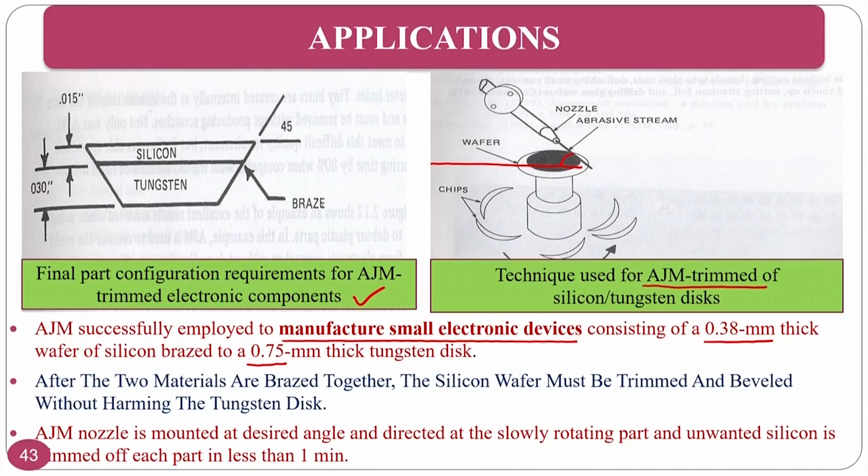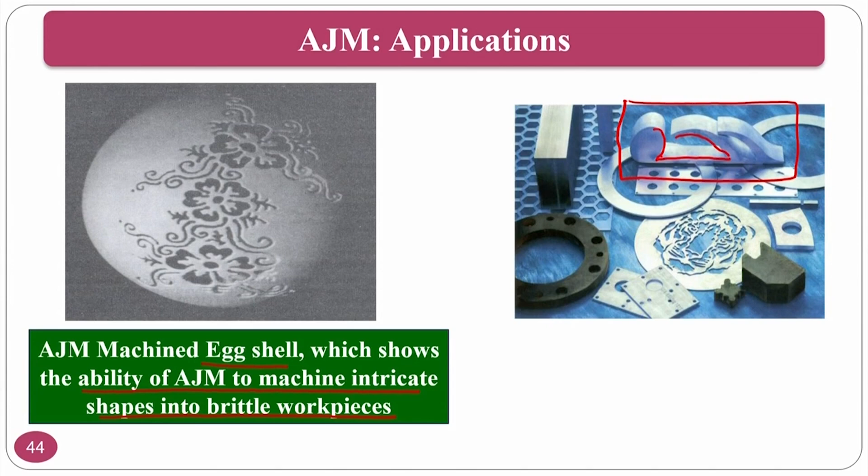Some of the complex geometries you can cut on some of the thick sheets also. It is used to drill and cut hardened metals. Normally drilling or cutting of hardened metals is also possible.

It is used for machining of brittle and heat sensitive materials like glass, quartz, sapphire, mica and ceramic. These are some of the advanced materials where you can machine without any heat generation, because if these are heat sensitive, heat may change their metallurgical or morphological structures.

If you don't want metallurgical changes that occur with respect to temperature, you can use abrasive jet machining, since there won't be any heat generation, and so there won't be any changes in thermosensitive materials. It is used in the manufacturing of electronic devices, as we have seen in the advantages.

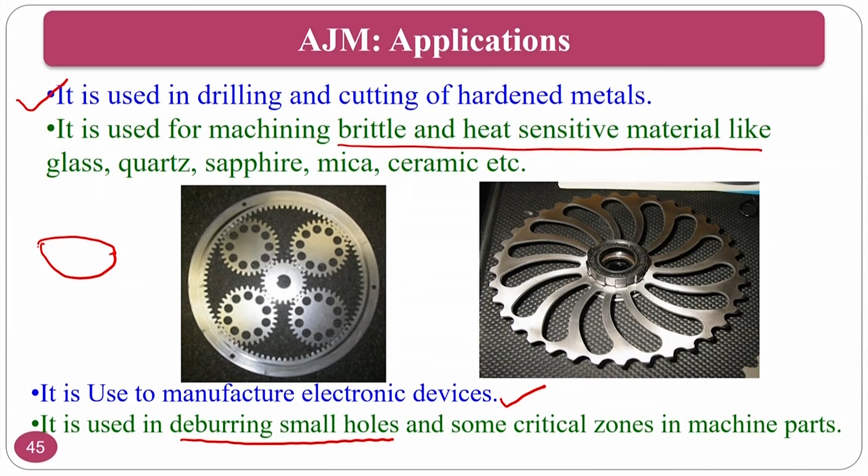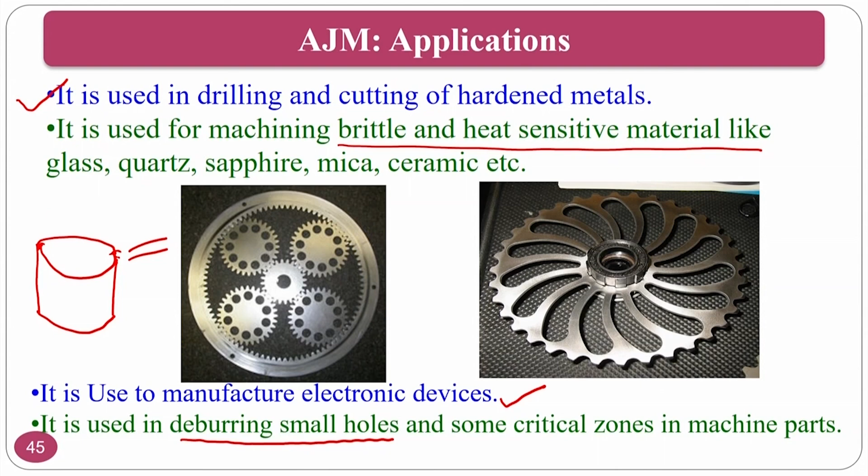It is also used for deburring of micro holes. If there is a burr on a hole on a surface, by tilting your nozzle you can remove the burrs. This type of deburring application can also be done by the abrasive jet machining process.

Some applications include manufacturing of butterflies, dendrite structures, cycle structures, and gears. Many complex shapes with thin structures as well as thick structures can be made and cut using the abrasive jet machining process.

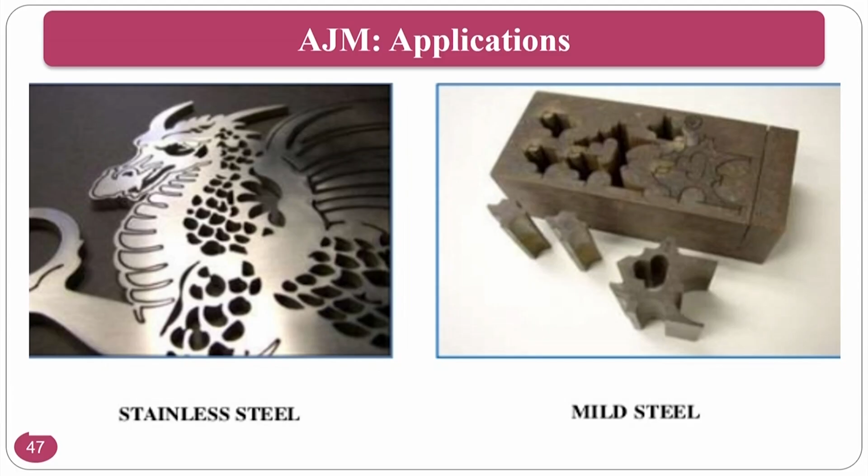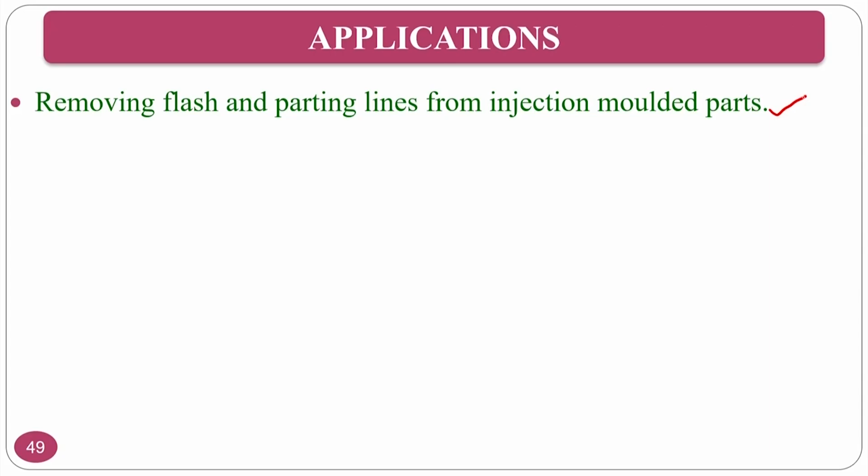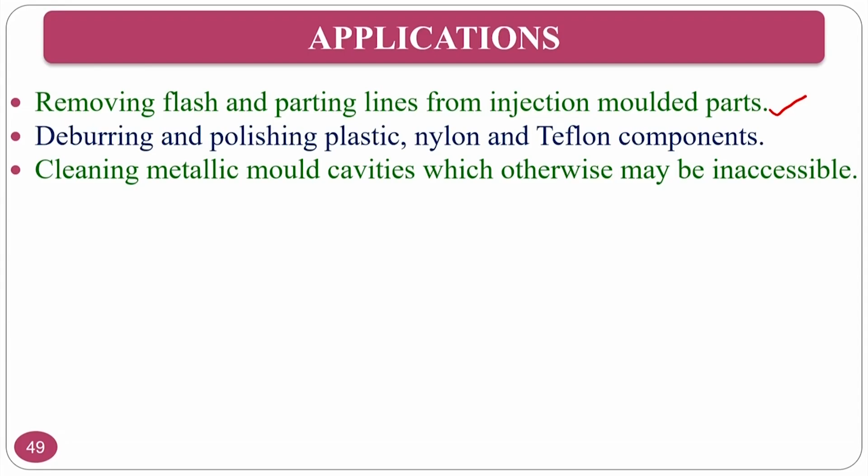Some people might have used abrasive water jet machining as well, for similar applications. Removing flash and parting lines of injection molded parts can be done, deburring and polishing plastic, nylon, and Teflon components can be done, and cleaning metallic mold cavities which may be inaccessible by other processes can be done by abrasive jet machining.

Cutting thin section fragile components, that is brittle components made of glass ceramics, can be machined using abrasive jet machining. Removing glue and paint from paintings and other leather objects can also be easily done. Frosting the interior surface of glass tubes to generate textures can be done using this process.

Manufacturing of electronic devices, as we have seen, silicon and other materials can be trimmed using abrasive jet machining by giving some tilt to the nozzle. Permanent marking on rubber stencils can be done, and drilling on glass wafers, titanium, and other foils can be done. Marking, engraving, and glass frosting are other applications.

Another part I want to touch on here is abrasive jet machining. You can manipulate or modify it to abrasive jet polishing also. I will give you one or two slides as a glimpse of this.

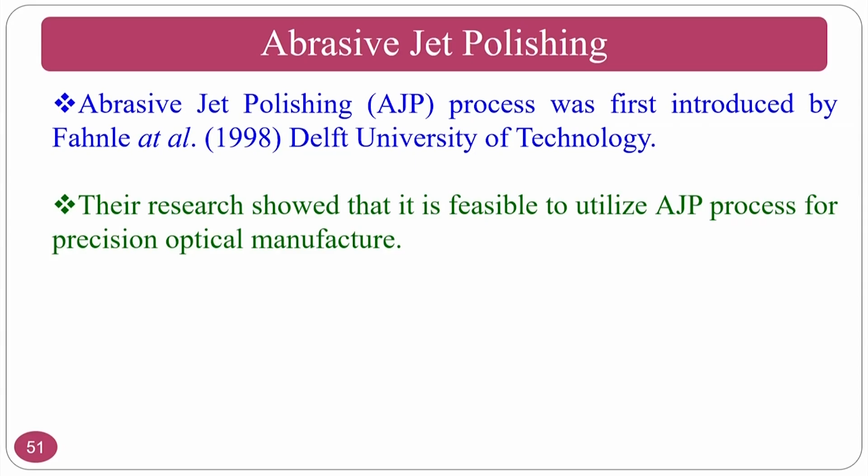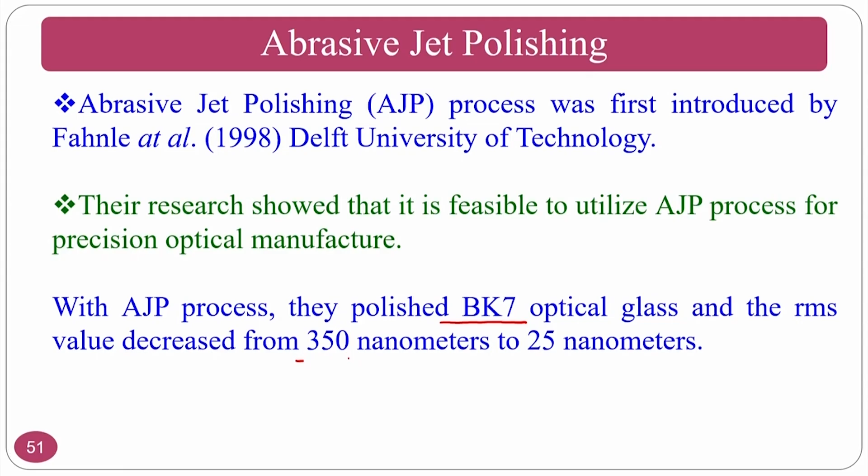Abrasive jet polishing was first introduced by Fahnle at Delft University. Their research showed that it is feasible to utilize abrasive jet polishing for precision optical manufacturing. Using the abrasive jet process, they polished BK7 optical glasses, and RMS values decreased from 350 nanometers to 25 nanometers, which was the best value they achieved. So abrasive jet polishing techniques can also be done, but keep in mind that BK7 is one of the brittle materials.

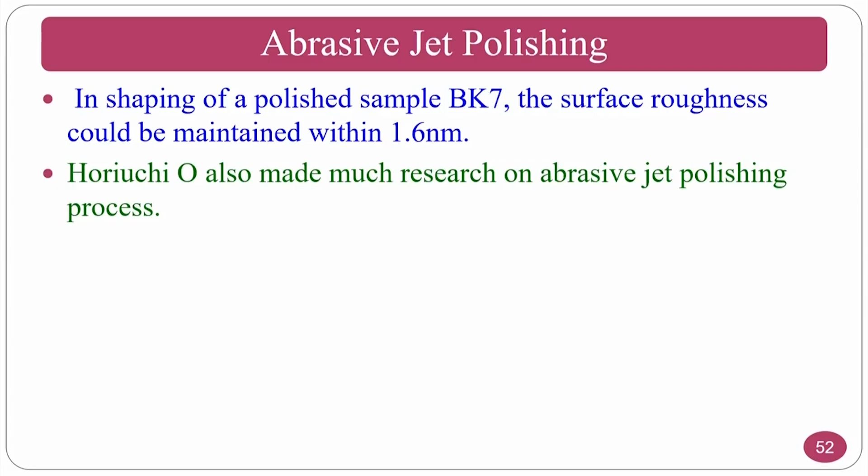Horiuchi also conducted research on the abrasive jet polishing process, and I am giving some literature on this since not much research work has been done on abrasive jet polishing. If people want to take up or modify the existing abrasive jet machining process to abrasive jet polishing, that can be done, and roughness values of 1.6 nanometers can be achieved from the surfaces.

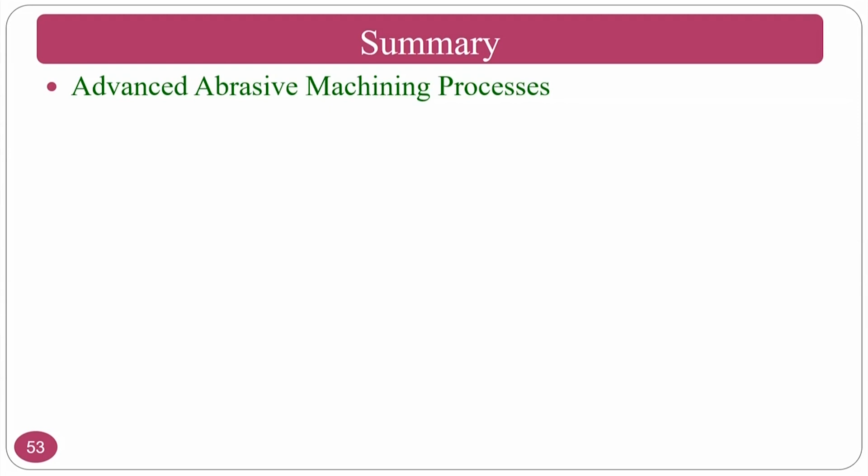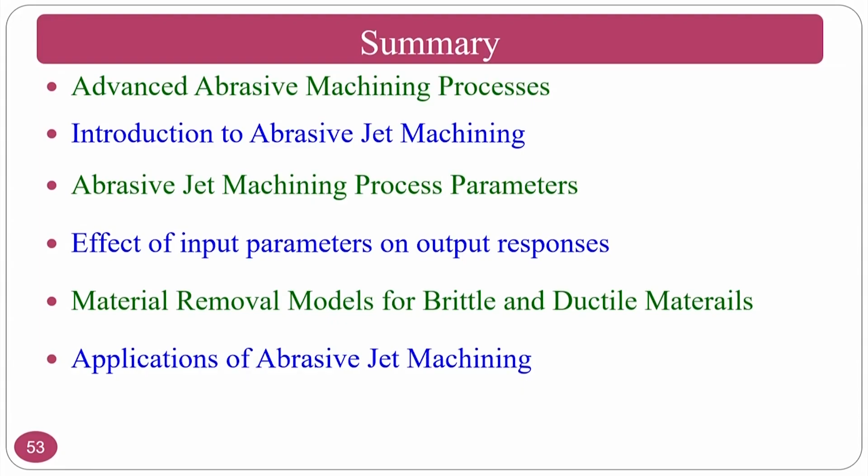The summary of abrasive jet machining can be summarized as follows. In this section on advanced abrasive machining processes, I covered: introduction to abrasive jet machining, abrasive jet machining process parameters including input parameters and their influence on output responses, effect of input material removal models for brittle and ductile materials, applications, and I also touched on abrasive jet polishing. This concludes the abrasive jet machining process.